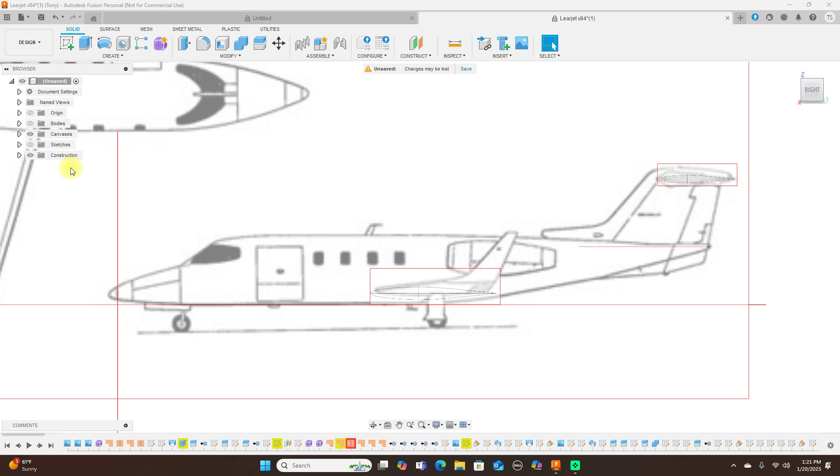And I decided to make foam core wings for this Learjet also, and they're going to be balsa sheeted. I may just cover them with fiberglass. I'm not sure at this point just yet. But this is what I've been working on here. And as you can see, I used an airfoil here. I don't remember which number airfoil it was, but it's an actual airfoil.

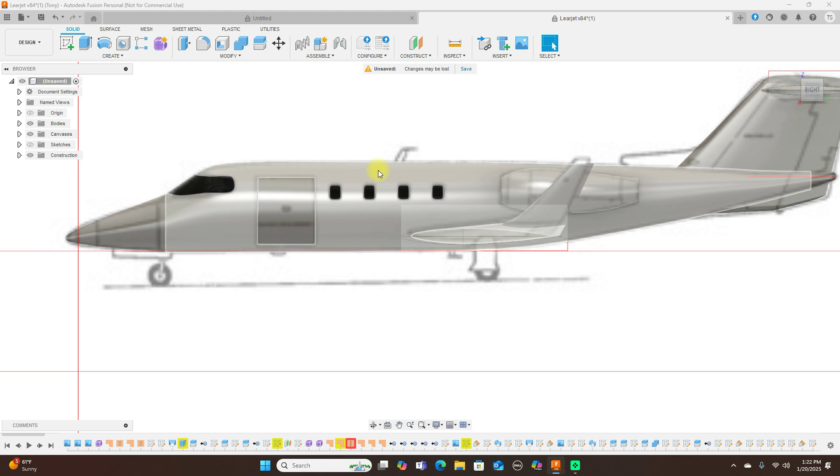And also, let's turn on the bodies here and turn off the canvases. And this is what it looks like for now. I still have to put that little, I don't know what it's called, but this portion right up here on here. And that's not very hard to do either. But this here is a very nice looking Learjet too.

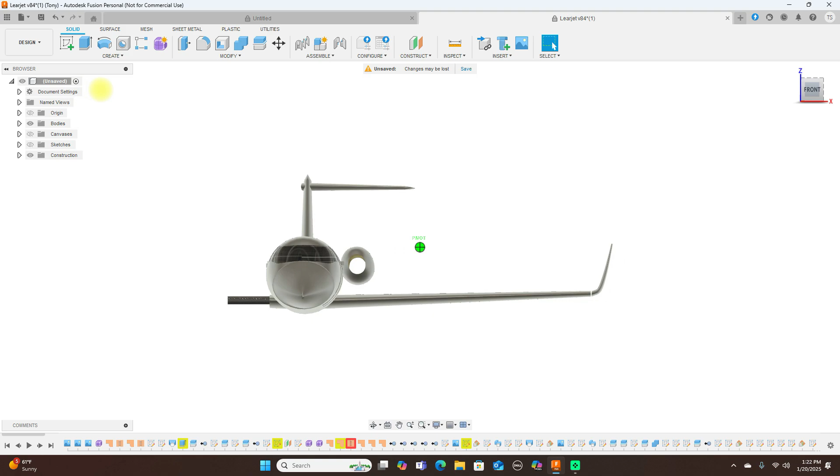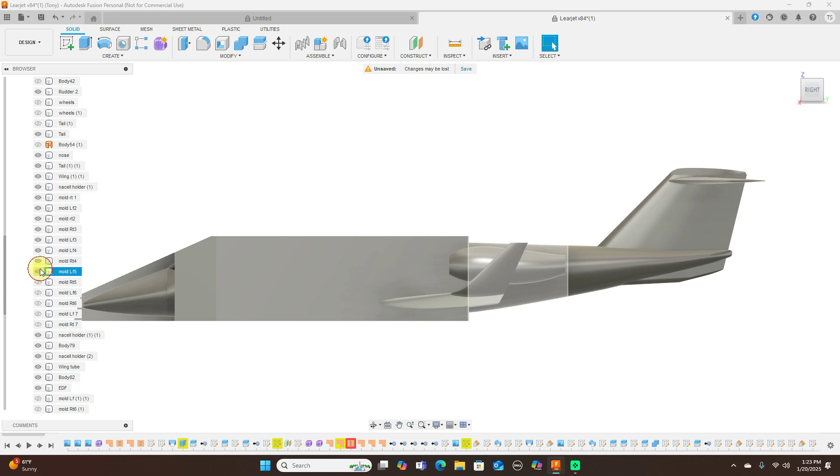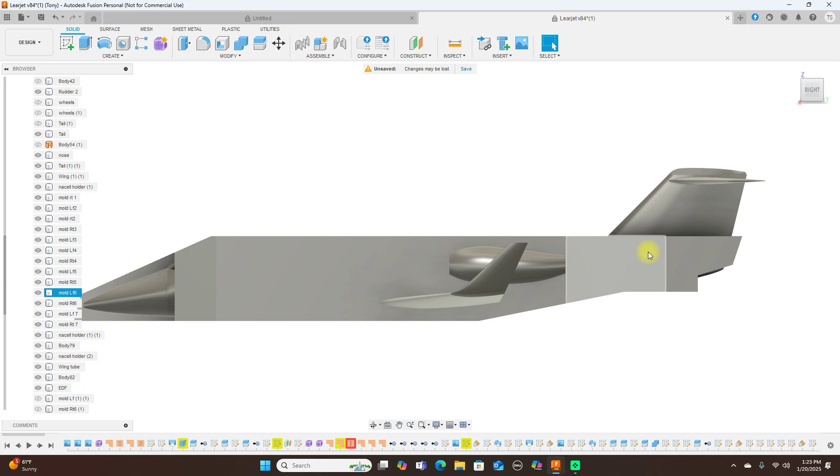And so I've been working on this and the mold also. So let's see here now. We have the molds here. Let's turn on the molds, as you can see. All the way back. Now, these are a lot of sections here. The molds, when I actually printed them, there are not this many, I don't believe. But here are all the molds. And my wings have already been cut out as well, the foam core.

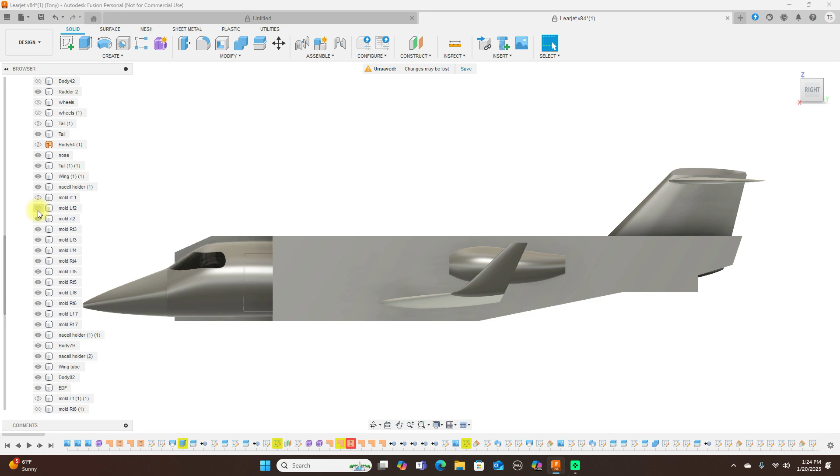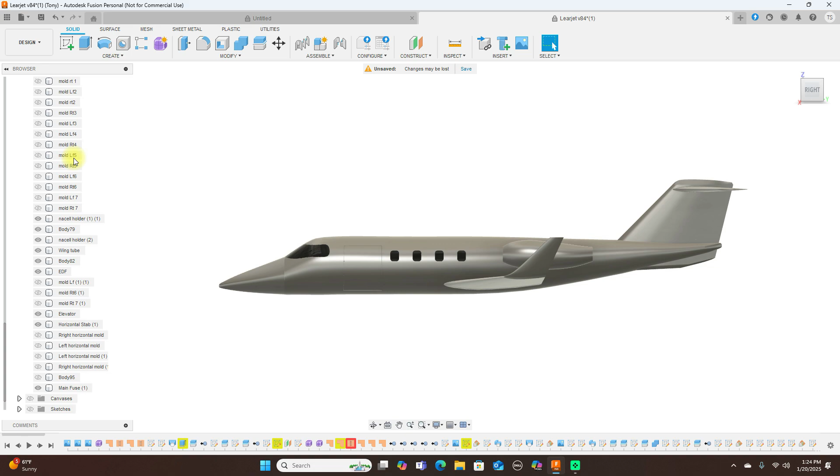And I just have to cut this out, the horizontal stabs. So I'll turn these molds off. Now my molds are printed already, and I'm very happy with how they turned out. I learned a little more about 3D printing molds, and so they turned out much better. But turn on the canvases here. And turn off the bodies.

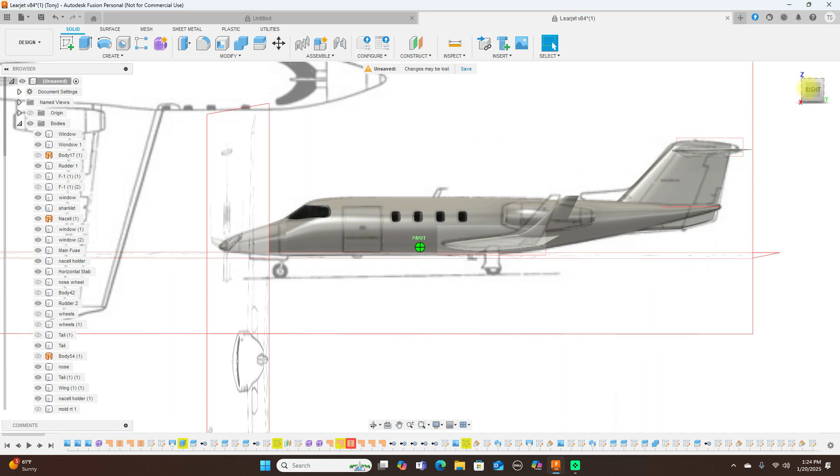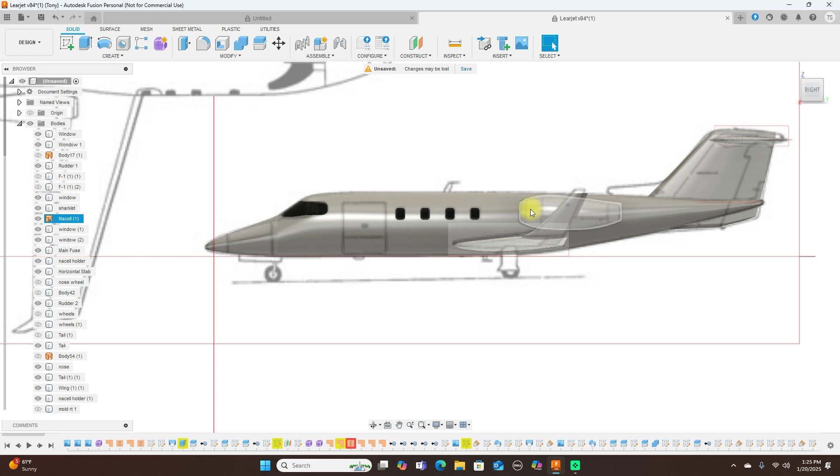Now, when I designed this or modeled this in here, this is all done with forms. And then like these here, when I used the form, I haven't converted those into a solid body as of yet. But even though I still used a form to model this. So before making the molds of these, I just have to turn these into a solid body. And to turn those into a solid body, it's pretty simple.

All you do is put a cap on this end. I might as well go ahead and do it now. Just put a cap on this end, or you come up here to surface, and you're going to patch this end, and you're going to patch this also. And then once you patch these two, so all this are patched, then you just go to stitch, and you'll select the front, the middle, and the back, and hit OK, and that'll turn it all into a solid body.

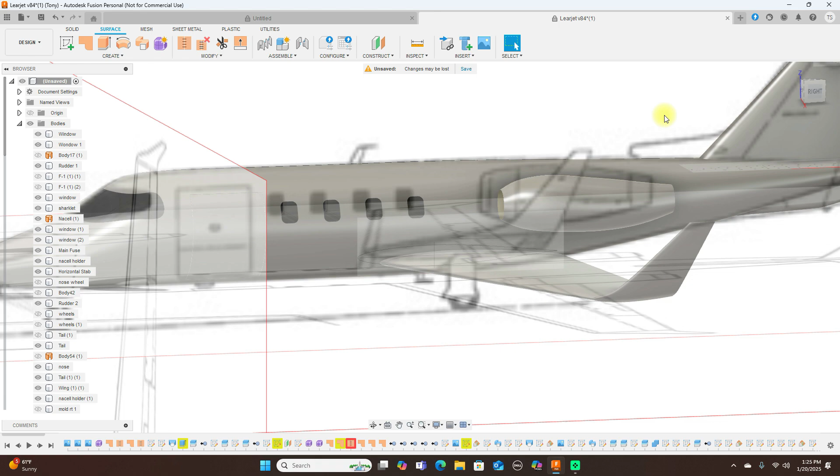But yeah, so this is the CAD portion of this jet. And next I'll show you my molds and the wings for this. So be right back.

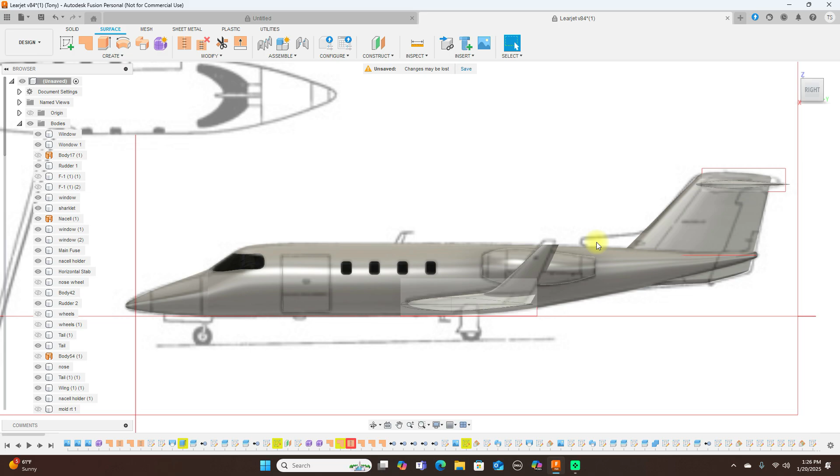Okay, here are my molds for this Learjet. Have the back half here. And this is just one side of the jet, not both sides. And here we have the nose of it.

And then we have the main section right here, which is great. Now, this is all printed with PLA, and the finish on here, how I get this mirror type finish, a couple of my videos, I'll have a link to them in the description here, tell you how I got this surface to shine like this. It's very simple to do, and it doesn't even take long. It just requires some sandpaper and, what's it called, automotive primer.

You just brush that on thick, and well, first you sand it, then brush on the primer, then you sand some more, and then if you need more primer, you put more primer on it. But if you don't need any more primer, then you just put your color on it, then you polish that out and do what you need to do with that too.

But again, this is the finish I like to have on my molds, because the parts come out looking really nice. I like my parts to come out of the mold looking nice. It's just a thing that I like. Some people don't really care because they're going to paint the part and stuff like that. But I just put in a little extra time because sometimes I like to paint in the mold too. So when you pull the part out, the part is done. So the mold has to be in a pristine condition, and so I just do that regardless.